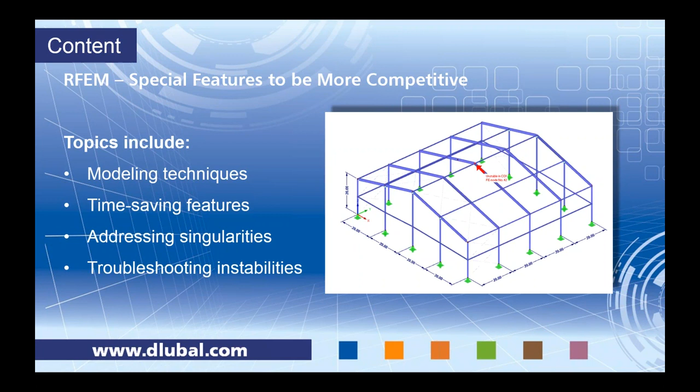I don't think there's a single engineer out there who has modeled that hasn't encountered an instability of some sort. So today I just want to show you some features in RFEM that I think help you troubleshoot these instabilities and overcome them quickly. And today's examples will be these 5 examples here. You can see a couple are more focused on the finite element surface elements, and the other 3 are more focused on beam and foundation structures of this sort. So with that, I don't want to spend too much time on the introduction. We can go ahead and get started with our modeling.

So for our first example today, I just have a simple frame here. If I scroll in, you can see our W shapes for our columns, W shapes for our beams, nothing too elaborate. It's restrained in the out of plane direction. And I went ahead and applied some line loads here. Dead load, we have 3 kips per foot. Live load, 2 kips per foot. And then I put a wind load, a lateral load of 1 kip per foot on the structure.

You'll also see here I have some load combinations that were just created according to the ASCE 7 using these 3 load cases. And then I also have my result combination. Result combination is nothing more than an envelope solution to give you the max and mins for all the load combinations that I have specified from the ASCE 7. So with this result combination, I want to go ahead and run an analysis.

And it tells me that the results are not found, so it's going to go ahead and run through all of those load combinations. And if I take a look now, I have a results option down here at the bottom of my Project Navigator tab. So this is where I can actually control what I see graphically from my results. You can see here that right now I have my moments in the local Y direction displayed.

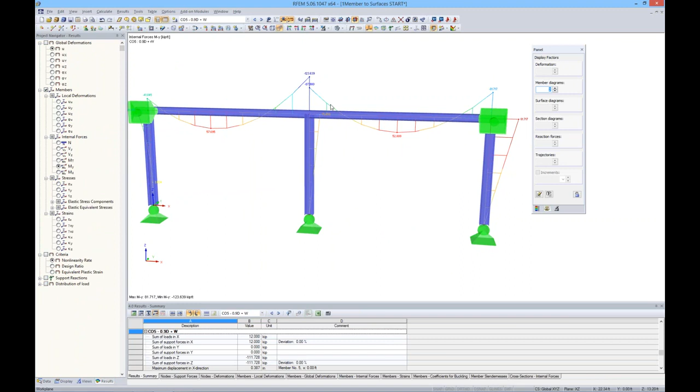And we have a max and a min, and I can go ahead and scroll through all of my load combinations here, and it updates according to which load combination was shown. I can go ahead and increase my member diagrams here just so you can see them a little bit more clearly. And we can take a look at our axial forces. Maybe we want to take a look at shears.

We have stresses here. And the other thing that I also utilize in this model is we have, as I mentioned, quite a few add-on modules. So we have one called RF-STEEL Members, and essentially it's just a stress analysis of our steel members. I'm using the results from our result combination to go ahead and get a stress ratio.

And you can see here that if I take a look at my colored panel list, my ratio is actually 1.11 at this intersection. So for design purposes, this obviously is not okay. We can't have over 1.0, and in some cases, maybe it's 0.8, it's 0.9. You can see the rest of the beam is relatively okay, even at these other column locations at 0.75.

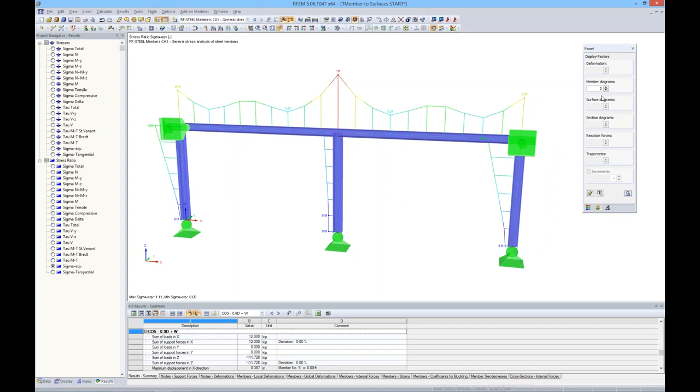If I go ahead and decrease my member diagram, we can really see clearly where the problem area is. It's right at this intersection. So we have a couple options here. We can certainly increase the size of our members, but again, this can result in an over-conservative design because the only problem area is really this intersection here.

So what I'm going to propose is that we maybe take a more detailed look at our intersection here with a finite element analysis. So if I go ahead and go into our wireframe view and I turn off my results, we can see here that our members are just simply 1D elements. When you're drawing a member in the program, it will only be this line, which is the centroid of the section, as a 1D element.

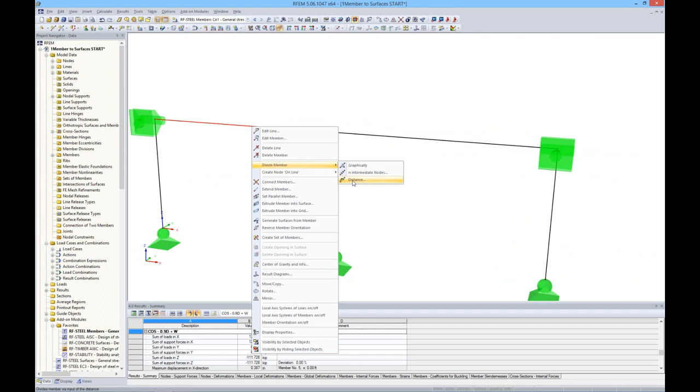I want to go ahead and divide this member here. So all I need to do is right-click on the member, and I go to Divide Member, and I have a few options here, but I want to divide by the distance. You'll notice this arrow here is going from left to right, so we know where the start and the end of our beam is. So I want to go ahead and divide the member 2 feet from the end, and I hit OK. So now you can see that I have 2 separate members.

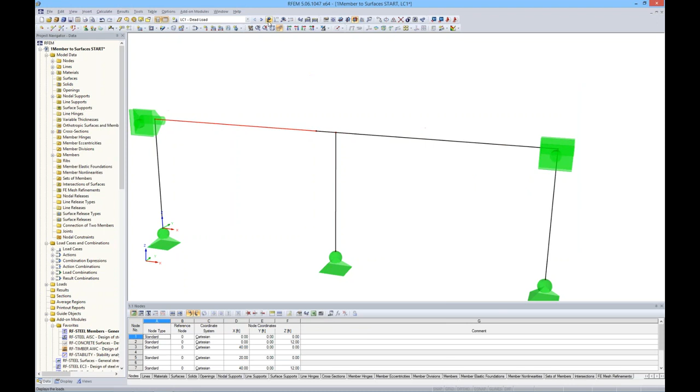And you might be thinking, okay, well, what about the loads? What happens with the loads when you divide a member like this? But you can see that the loads were also divided, and the program's smart enough to keep that value on the divided member as well. So we want to go ahead and do the same thing with this one. So I will divide the member by end distance. And this time, because my arrow is going the same way from start to end, I want to divide it from the member start by 2 feet.

And if I select this column and simply hit the Enter key, the last dialog box will come up. So that's just a quick tip rather than right-clicking on the member to pull up the dialog box again. And we want to go ahead. And now we have these 3 separate members right here. So I'm going to go ahead and render it again.

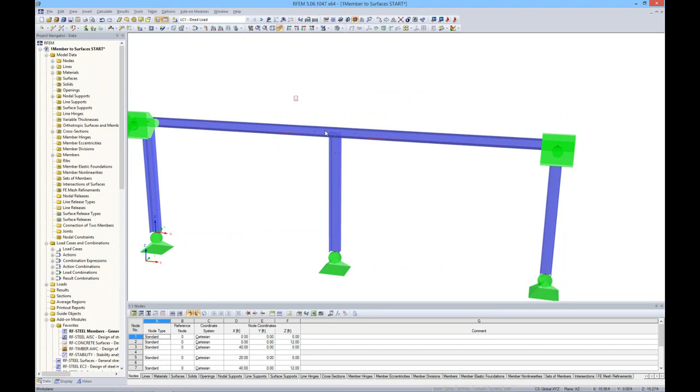And I'm going to select these, and the selection is just similar to AutoCAD. If I drag from left to right, it will only grab what's in that box. If I go from right to left, it will grab everything that that box touches. So for this case, I'm just going to select here, and I'm going to choose visibility by selected objects. So now I can no longer select anything other than these 3 elements that I specified before.

So this is a pretty powerful feature that RFEM has that I haven't seen too often. If I select my 1D members and I right-click and I go to my member, I can generate surfaces from members. And now you can see, let me go ahead and put it in the wireframe view, that these 1D elements are now surfaces.

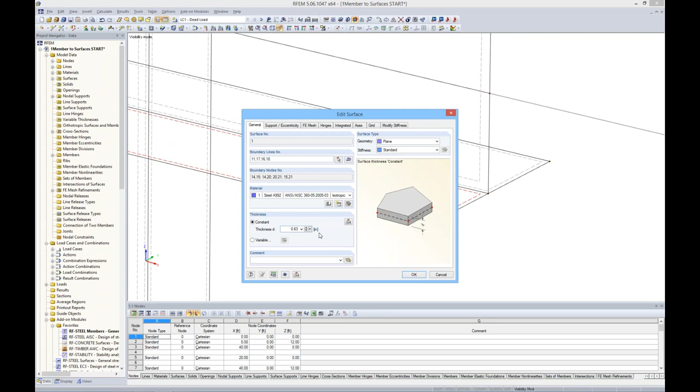So they're 2D elements now. If I click on the web for this surface, you'll notice the thickness is 0.38, steel A992. All of this is taken directly from the section that you specified, the W shape. If I select a flange down here, the thickness is 0.63 inches. So again, everything was taken from that W shape.

So you might notice here that we have some geometry issues. Obviously, this is not valid. So we want to move the flanges of the column to the bottom flange of the beam.

I'm just going to hold down my Control button and select all of these nodes at once, and use our Move Copy tool. I don't want any copies here, I'm just going to be moving. Typically I would need to know what this distance is to move these flanges down to the bottom flange of the beam. Maybe after a little while I could decide, okay, half the depth, take into account the thickness of the flange.

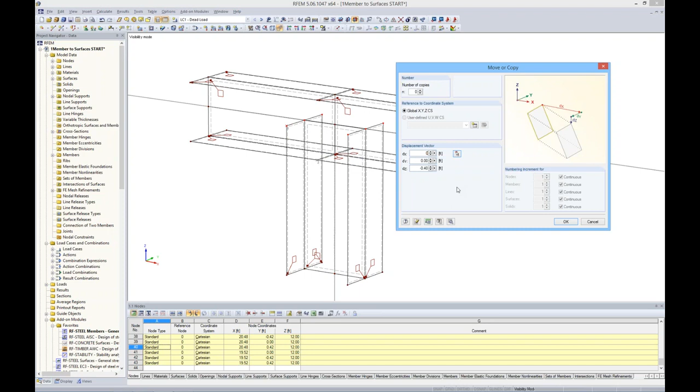But instead, RFEM has this tool where we can select 2 points to actually get a displacement vector. So if I select from the top of the flange down to the bottom of this flange, you can see I now have a displacement vector in dx and dz. We will not be moving it in the dx direction, but only in the dz. So I hit OK, and you'll notice that everything lines up quite nice.

Now, the other thing to consider is that we have this single point here where this 1D element is framing into the surface. This can actually cause a singularity. All of these forces are being transferred to this one particular point right here rather than being distributed over this entire surface. So actually what I want to do here is to create a rigid plate at the end.

For our surfaces, if you go up to this button up here, you'll notice that we have quite a few shapes that you can choose from. So we have donuts, semicircles, triangles, anything really that you'd like to do, polygons, and the program will create this surface element and automatically mesh everything. So there's no need to individually mesh the elements.

Some other programs require you to tie nodes together, tie elements together, but the program will do this all automatically. So for this case, we're going to go ahead and choose polygon. And for my stiffness, I'm going to choose rigid. Everything's grayed out because our stiffness is super high. So here we will just go ahead and draw our plate. And once we close the loop, we can see that we have a new element here.

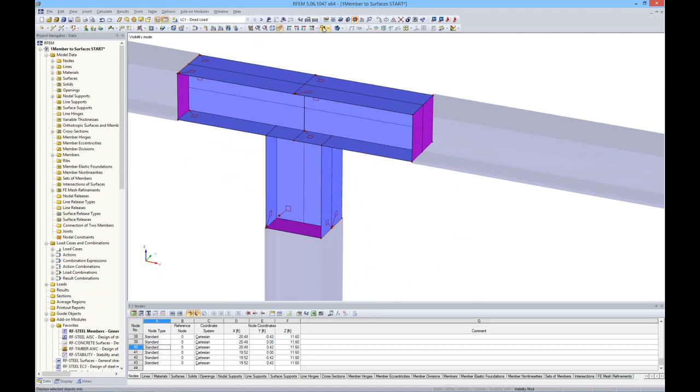We will do the same for this side, and lastly, we want to do the same on the bottom of the column. And I right mouse click to get out of that dialog box. You can see now that if I go ahead and render my views and turn off my visibility mode, that everything lines up quite nicely.

Surfaces are only modeled at the center line of the thickness, so we do have the option in our display menu. This display menu is essentially everything that you'll need to adjust your graphical view. If I scroll all the way down to the bottom, I have the choice for rendering here, the model, the solid model, surfaces, and I can actually fill including the thickness. And then if I zoom in, you can see that everything lines up with the 1D element to the surfaces. I will go ahead and turn that off.

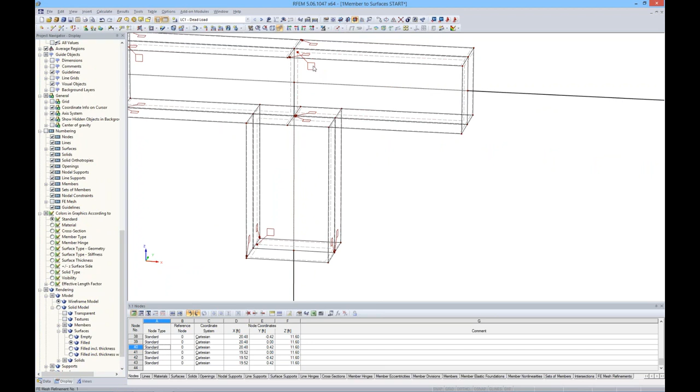Now the other thing I want to show you is the FE Mesh. You can notice that the program has automatically inserted these refinements. For the sake of this purpose, I'm going to go back to our data and go ahead and delete these.

Now, if I go to calculate FE Mesh settings, and I think most people are familiar with this with an FE analysis, you have to specify your length of your finite elements. Default is typically 1 foot. If I go ahead and generate that 1 foot, we can see that this is clearly too large for this situation. We only have one FE element for the entire width of this surface here. So if we go to calculate FE Mesh settings and change this to 0.1, regenerate the model, we can see that this is much better.

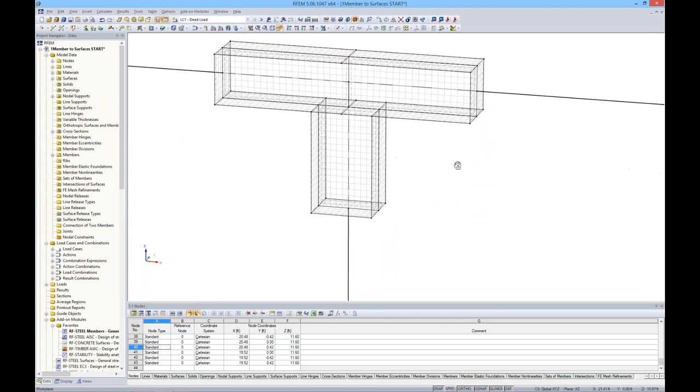The program is tying all nodes together, all lines, so you don't need to worry about that. Okay, so one last thing to consider is our loads.

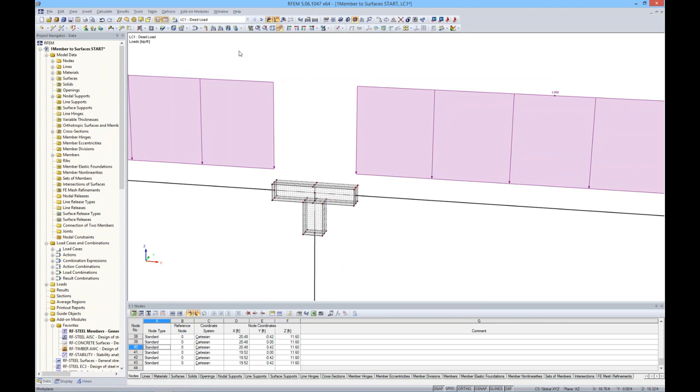For our dead load, as I mentioned before, we kept these two member loads, but in this case we don't have a member here anymore, we have a surface. So we need to delete these, and I'll apply a line load instead, which is similar to a member load except it can be applied to surfaces.

For here, we want to apply -3 kips per foot. I zoom in and click on my lines, and now you can see that the 3 kips per foot has been added.

I want to adjust my live load. If I hold down the delete key and click on each load, that will delete those loads. Again, I draw a line element, and because I'm in live load up here, that is the load case this load will be generated into. For this one, I want to specify it as -2 kips per foot. I scroll in here, and we have our loads.

Okay, I believe we're ready to run our analysis. I go to my result combination, and it's asking if the results are not found, and up pops our dialog box. This will take slightly longer than our 1D elements because we now have the 2D surface elements. You'll notice it's simply going through each iteration as the load increment increases.

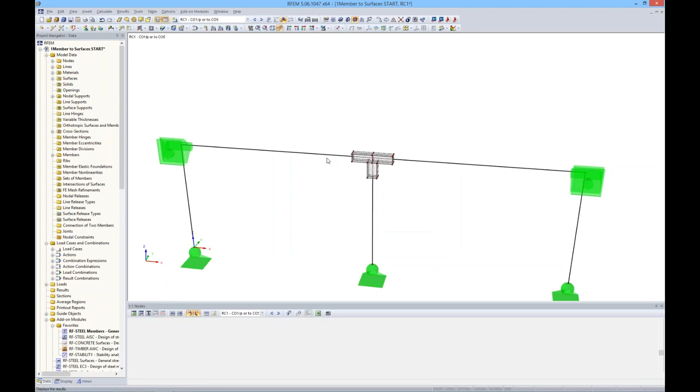So instead of the members, you'll notice the member diagram stops short of those surface elements, which is fine. I'll turn that off and take a look at our surfaces. If I scroll in here, I can now view all the different internal forces for the member: shears, moments, everything of the sorts.

What I'm really interested in is the stresses, so I go ahead and view the von Mises stresses. Everything looks okay until I zoom into these points. We can still see that it's extremely overstressed.

So we have an option here where maybe we want to add a plate to this bottom flange, maybe an inch plate.

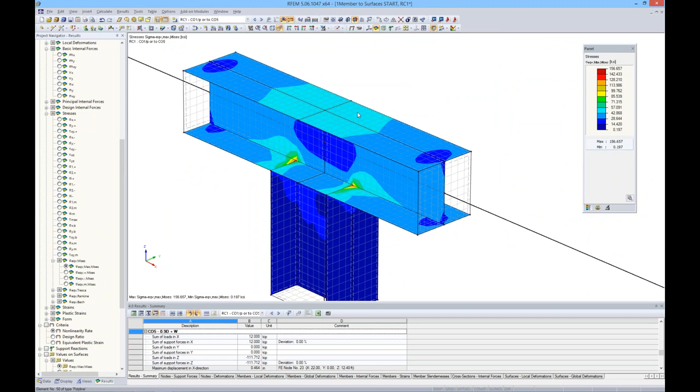If I turn off my results and hold down, select this surface and hold down the control key, then I can select all of these bottom flanges. Now I can right click... oh sorry, I lost it, let me do that again. Okay, now I can right click, edit surface, and let me increase my thickness to 1 inch.

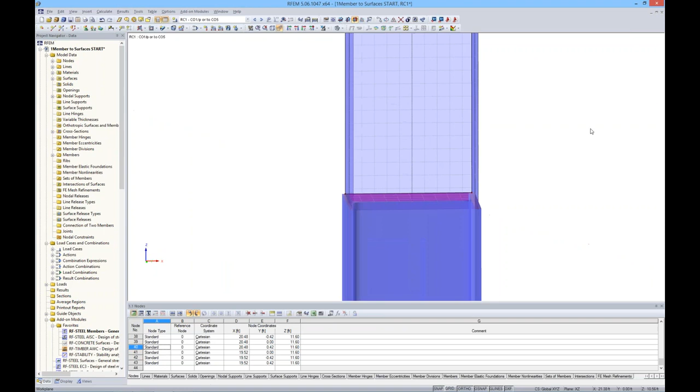In the rendered view, we won't see that unless we change it to the thickness under our display options. You'll see that it's slightly thicker than our 1D element, which is exactly what we want. I'm going to change it back to here.

Now, the other option is to do a plastic analysis. With our add-on module, MatNL, which takes into account nonlinear materials, we can select all of these, right-click, edit our surface, and create a new material.

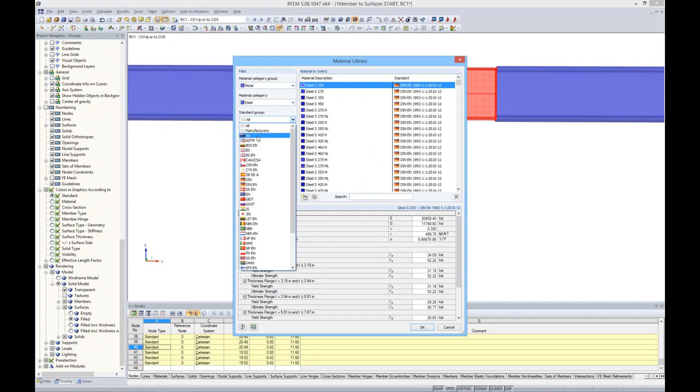I go into my materials dialog box, and you can see the library is full of quite a few materials. We can filter them according to metal, steel, ASTM, but more importantly we have this favorites group option, so you can just save the ones you use most often. For me, I created one called USA, and I'll use steel A992.

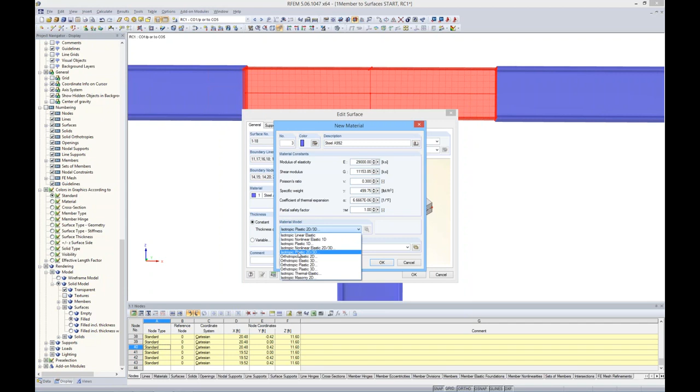Now, the material model default is isotropic linear elastic, but for this case I want to use isotropic plastic 2D, 3D. Up pops this other dialog box. You can see our stress strain diagram, with our yield stress here, 50 KSI, automatically filled out, and our strain hardening modulus. So here I can click OK. Everything looks fine with that. I hit OK, and I hit OK once more.

And if you zoom out, and you're not quite sure if the material is different than the rest, you'll notice I'm in my table down here with steel A992, which is isotropic linear elastic. As I highlight the field in the table, the members themselves will highlight as well. This blue one just means it's not currently being used. And the steel A992 plastic 2D, 3D, you can see those were actually applied here.

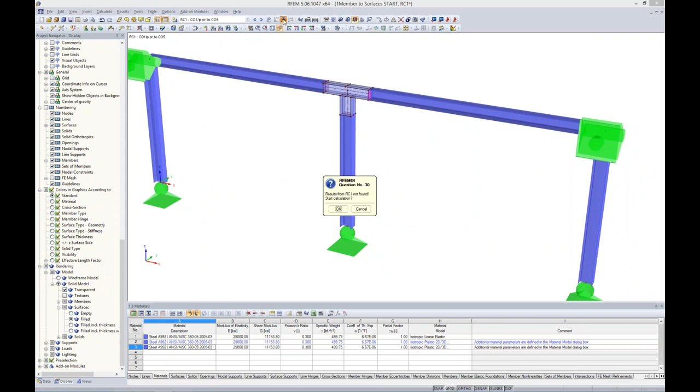Okay, so I want to go ahead and run my result combination again. This will take slightly longer than the last one because now it's a nonlinear material. Keep in account that the size of your mesh also matters for your finite element analysis—at some point, the smaller mesh you go won't change your results. So I'd suggest keeping a mesh that doesn't create a super long solve time but still gives you accurate results. You'll notice if you decrease the mesh size and solve again, your results won't change by much.

We also have this graph here that shows the maximum displacement as the program cycles through each iteration. So as soon as this is done solving, which will be just a second longer—again, it's just because we have a nonlinear material.

Now I want to take a look at these contours. Each FE element actually has a value at each corner, and what the program is doing is using a smoothing algorithm to tie all of those values together to create a nice smooth diagram.

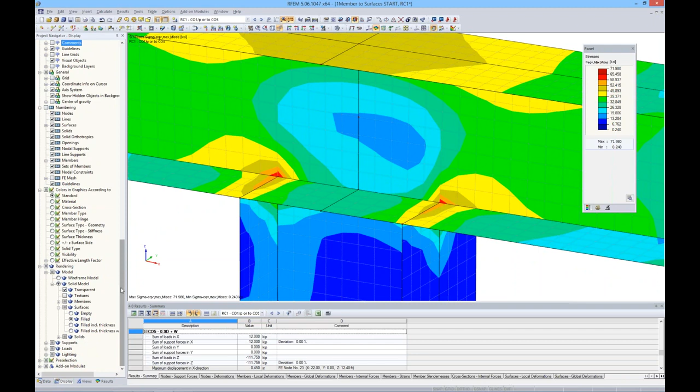Under my display tool, if I scroll up to results, I want to choose constant on elements. This is going to average out the 4 values for each FE element, so you can take a look individually at each one. You'll notice that nothing exceeds 50 KSI, which is our yield stress—exactly what we'd expect.

I think an important thing to show you here is that we have an option under results called criteria. This criteria will actually show us the FE elements that are in their full plastic state at 1.0. These other two green ones are somewhere in between 0 and 1 as the ratio, and the other elements have not reached that state yet.

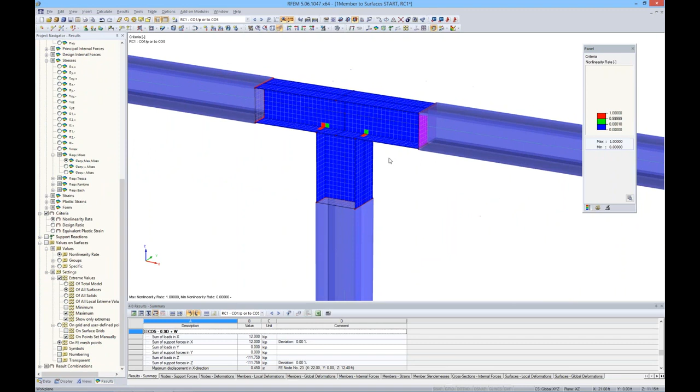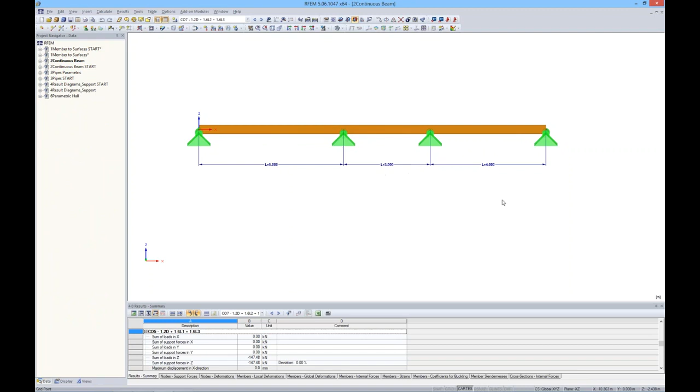So that simply concludes our first example. I want to go ahead and move on to our next one, which again is very simple—it's just a continuous timber beam with 3 spans, nothing too special about it. But actually what's going on behind the scenes is quite powerful.

The purpose of this example is to show you the use of parameters, or parametric modeling. If I go to edit parameters and move this dialog box down, you can define a variable in the program and use these variables in an equation to change span lengths, loads, or angles. There are quite a few options—we can change areas, angles, surface thicknesses. I'll get into that in just a minute.

If I type in 2 meters here, and for my B length, which is my second span, I'll type in 5, and for my C length, I'll type in 3. I hit apply, and you'll notice everything is updated—the supports moved. I also want to show you that if I look at my dead load, everything was adjusted with the loads as well. We have separate live loads on each span, and those were all updated too.

Now let's say I want to edit my live load to -2 kilonewtons per meter. I go ahead and hit apply, and you'll notice the live load was updated. So you can understand the benefit of using parametric modeling for a company that creates a lot of similar structures, but where geometry or loads change slightly—you can use parametric modeling to deal with these similar structures and improve your efficiency.

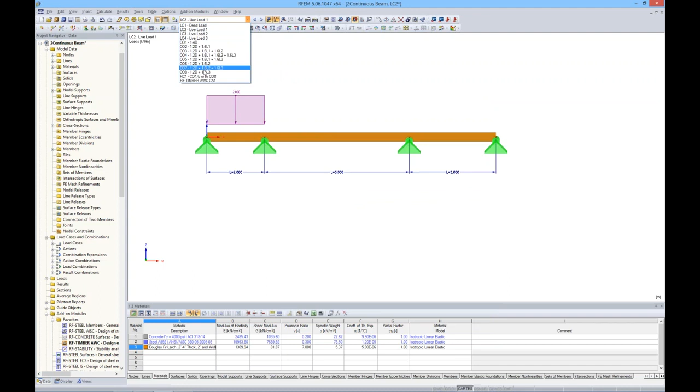Now the other thing I wanted to show you is if I go ahead and, again, I created quite a few load combinations from the ASCE 7. If I take a look at my result combination, it's asking if I want to run the calculation. Yes, this is just finding the max and mins of all those load combinations.

Now I want to take a look at my support reactions. You'll notice here that as I scroll through them, my support reactions are changing according to the different loads that I have. Now I want to show you our print report option and including these parameters.

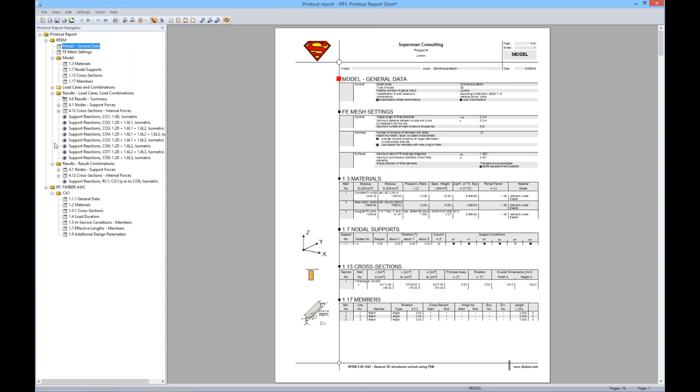I think RFEM has quite the powerful print report options compared to a lot of other software I've even used in my design career. If I go ahead and open up a printout report I created previously, a separate dialog box will open. You'll notice on the left is our table of contents, or report navigator. I can click on these and our report will update according to where I am.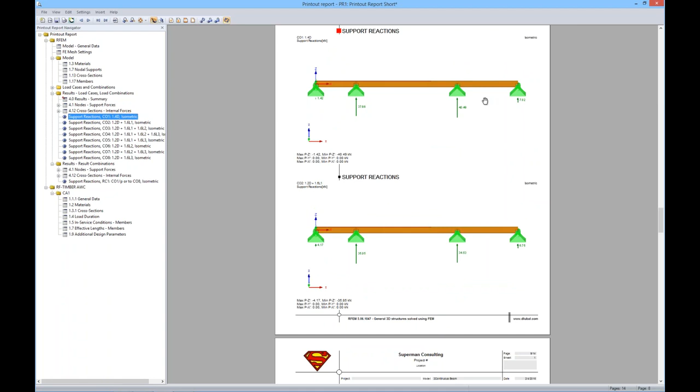Now the same goes for here. I can keep scrolling down and the table of contents will also update. I went ahead and put in some pictures here of our support reactions, and you can see this is reflecting our spans that we currently have, which is 2, 5, and 4, for each load combination.

If I go ahead and zoom in here, I can see load combination 3, my support reactions, my max, my min. Everything has nice headings, it's very clear. But let's say, okay, well my beam just changed all of a sudden.

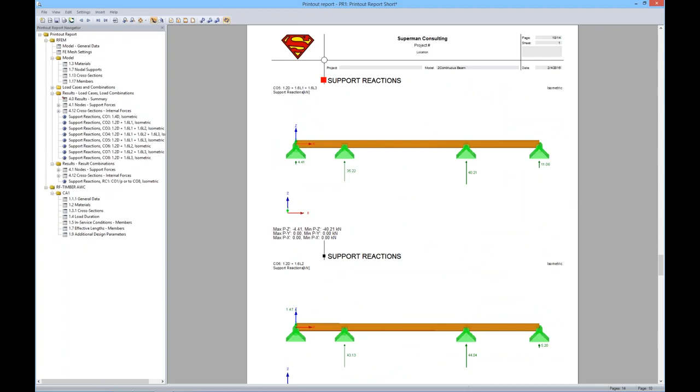So I'm going to exit out of this print report, no I don't want to save it. I'm going to open up my parameters, which down here in my table under my first model data tab is a quick link to my parameters.

And let's say I want to do 5 meters, 2 meters, and 3 meters. I hit OK, and you can see that everything was updated. Now I want to go ahead and run the results again, and I go back to my print report.

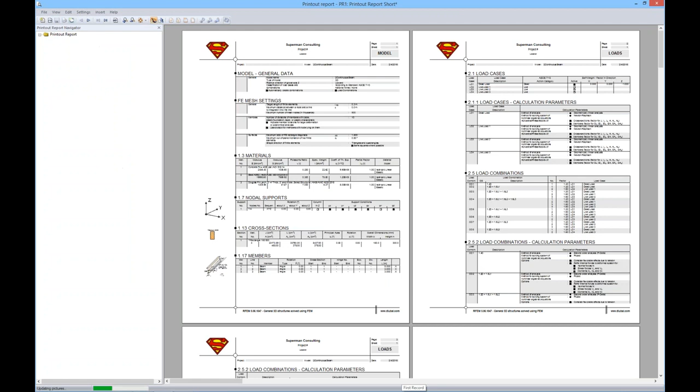Now I want to go ahead and jump down to these pictures, and you can see, well, it looks like we are missing our support reactions. Well regardless, I think we can see from our results here we have the support reactions shown, and it looks like they're shown here.

And it should go ahead and update in our printout report. I'm not quite sure why, but regardless, the geometry is taken into account, and everything in the print report will be adjusted according to the changes you just made.

I can showcase this a little bit further with the printout report by taking a look at our members. I'm going to turn off my support reactions, and I just want to view my moment about the y-axis. Of course, as I scroll through... oh, that was probably the issue.

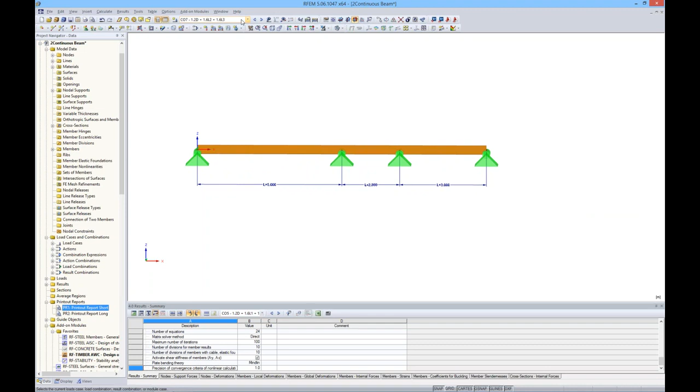I didn't run a result combination. So again, this is just an envelope solution of all the load combinations, and I think that's why the print report didn't show up, because I didn't run all of them.

I can go ahead and scroll through each load combination for the moment about the local y-axis. I go ahead and increase these, and let's say I wanted to print off this moment for each load combination.

Typically you would have to take a picture or a graphic, insert it into your PDF print report, go back, change the load combination, do the same thing. But we have an option in here called mass print. If I go ahead and go to my print option, graphic printout, I see the mass print here.

Now I can hit these settings right here, and I have 3 tabs that pop up: model, loads, and results. I'm currently in results, and the program knows I'm looking at the moment about the y-axis. But for my load cases and combinations, instead of the current one I'm in right now, I'm going to select all.

I hit OK, and now the program's cycling through each load combination for my moment about the y-axis, and it's going to insert those into this print report automatically.

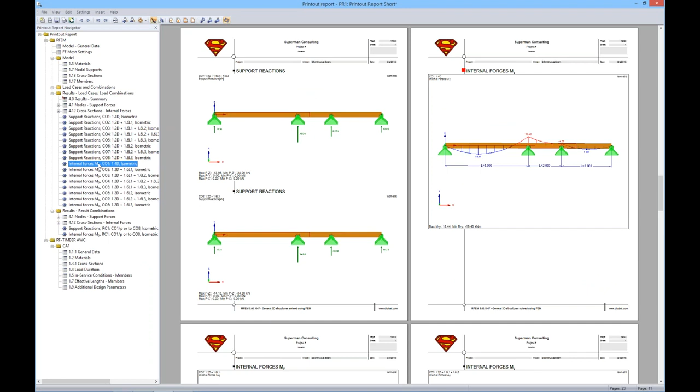So you can see now that my support reactions were updated. I just needed to run my result combination. But if I go ahead and scroll in here, I can see that now I have my load combination 1 with my moments, and it shows my max and my mins.

Scroll down, load combination 2, load combination 3. Everything is done automatically. So I think you can imagine how much of a time saving that is when you can use this mass print option.

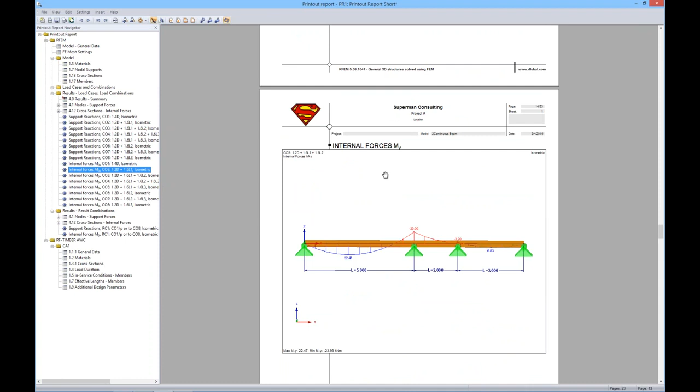Okay, so the question is, with parametric modeling, how do we actually incorporate these parameters into a model? So for the sake of time, I have already created this simple beam, and I've applied some loads on it just according to dead load and live load. And I want to go ahead and edit my parameters.

Now if I type in A for my first span length, the length automatically pops up and we'll just do 3 meters. B for my second span length, we'll do 5 meters, and C for my third. Now you notice nothing in the model is changing right now. I'm just simply defining what parameters I want to have in the model. And we'll go ahead and make this one 4.

Now let's say we also want to consider dead load. Now instead of length here, I actually want to go down, and this is where I told you before there's quite a list to choose from for the amount of parameters you can actually define. Precambers, moments, stresses, time, mass, percent. So we have quite a powerful option here when it comes to parameters.

For this case, I'm just going to go for a line force, and I will go ahead and do -4 kilonewtons per meter, and maybe my live load, again a line force, and I want to do -2. Okay, so now that we have our parameters defined, we need to actually apply them to this model.

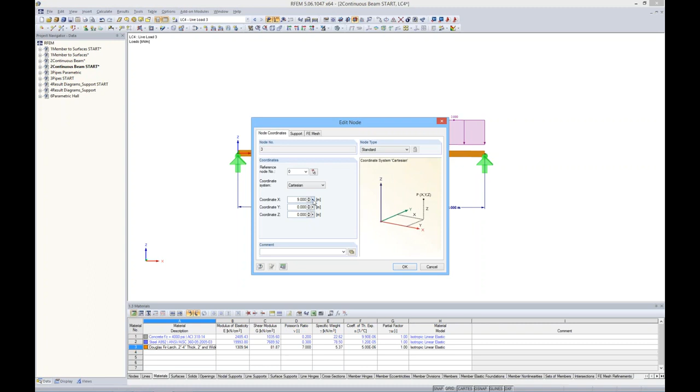I go ahead and do the same thing to this node. It's set at a static 8. I want to edit my formula, and I'll do A plus B. And now, again, it's dependent on those parameters. And lastly, I want to do this one, and I will go ahead and edit my formula, A plus B plus C. Okay, so everything is now dependent on my A plus B plus C.

Now we also need to do the same thing for our loads, and we can go ahead and highlight all of these. We right click, edit member load, and we can go ahead again the same way that we defined those node coordinates. Instead, here for the load parameters, for the actual value, I can use this arrow, edit formulas, and choose my dead load. I hit OK, and now that dead load is dependent on that parameter.

Now we just need to go ahead and do the same for each live load. And so instead of dead load, I'll go ahead and choose live load here, hit OK, and I do the same for each span. Edit my formula, add my live load, hit OK, and lastly I have this one.

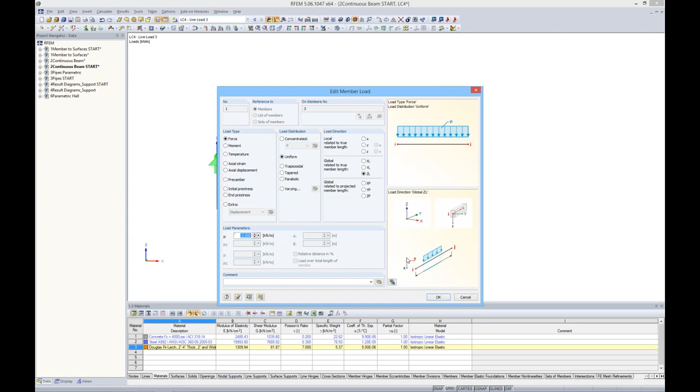Okay, so now if I go ahead and move this up and I open up my parameters, I change this to 2 meters, 3 meters, 6 meters.

We should see that everything is updated just fine. For our live load, we'll go ahead and choose -6 and apply that, and everything is updated. So you can see that this is obviously quite valuable, again, for a lot of the similar structures that you're working on, or maybe it's the same structure and there's a lot of changes going on within the design process. So that sums up that simple model.

So we'll go ahead and move on to the third one. This one is a little bit more complicated FE analysis with our surface elements. And I also created this model to have parameters in it as well. So you can see here I've defined my parameters, my angles, my loads within my pipes, which you can go ahead and define a pressure load within this pipe and maybe the spacing between.

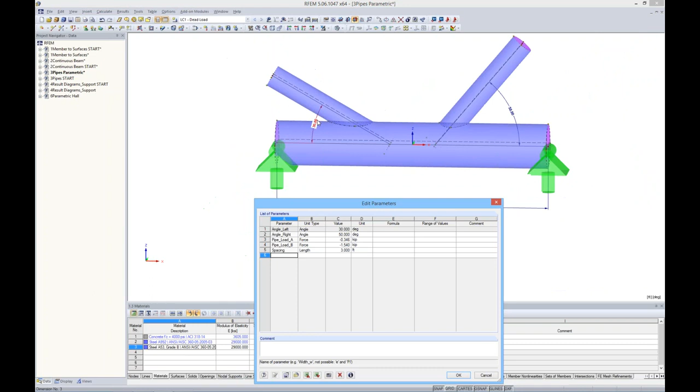If I go ahead and change this to 30 degrees and I hit apply, you'll notice that this pipe automatically changed to 30 degrees here. One thing to take note is that this is an intersection of surfaces. And you'll notice that when I change this to 30 degrees, everything was updated. There's no need for me to change my FE elements. I don't need to go back and change the geometry. The program's smart enough to make all of those changes as I go ahead and adjust the model.

I can show you guys again, if you take note at this 50, I can go ahead and change my angle to, let's say, 70 degrees. And I'll go ahead and hit apply. Again, everything is updated automatically.

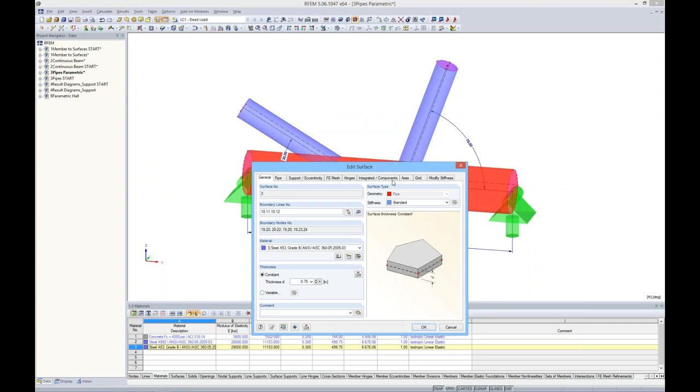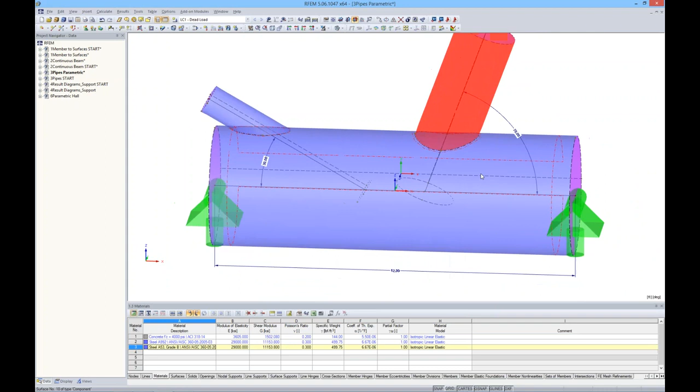I even have the ability to click here and right click to edit the component's parent surface. And we have a pipe option here. And I can change my radius to 2 feet. Again, everything is automatically updated. Those surface intersections are moved up and everything looks quite nice. We can do the same here. Maybe make this radius a foot, hit OK, and again, everything looks okay.

So I want to show you guys how to go ahead and create this model and create an intersection of surfaces. So I'm going to go ahead and open up this beginning model, and all of these are just line elements. They're not members, they're just simply lines in the program. I can define maybe members out of them if I wanted to, but in our case, I'm going to go ahead and apply a pipe surface. So I'm using these quick tools up here, and you'll see there's an option for pipe.

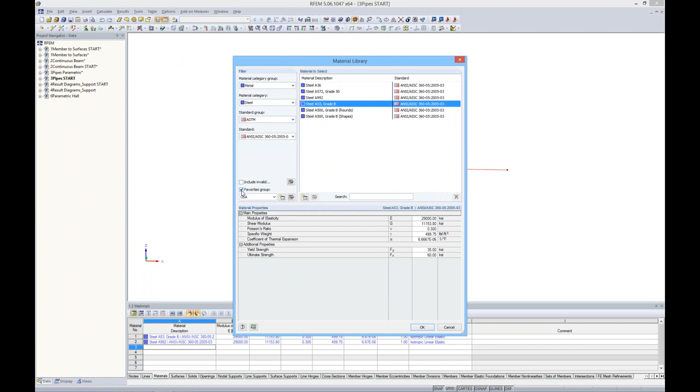Maybe my material when I first open it up is something like concrete, or maybe it's even timber, just something not applicable. So I can go in here to import a new material from my library. And again, for even metal, steel, ASTM, we have tons and tons of materials. I want to utilize my favorites group again, and I'll just go ahead and choose my steel A53 grade B. My thickness for my pipe, we'll just set that to 0.6 inches. And now we need to click on the pipe tab up here and choose our radius, which we'll just do 1 foot.

Now you'll see that the program automatically applied it to this line because I had it selected when I went into that dialog box. I want to go ahead and do the same for these two elements. So I can go in here to my pipe surfaces again. And you can hit the enter key and it will bring up that same dialog box, which is a little bit time saving. For my thickness here, I just want 0.2 inches, and my radius, I'll set it at 0.5 feet or 6 inches for these smaller strut pipes. Then all I need to do is just click on those lines and everything's created.

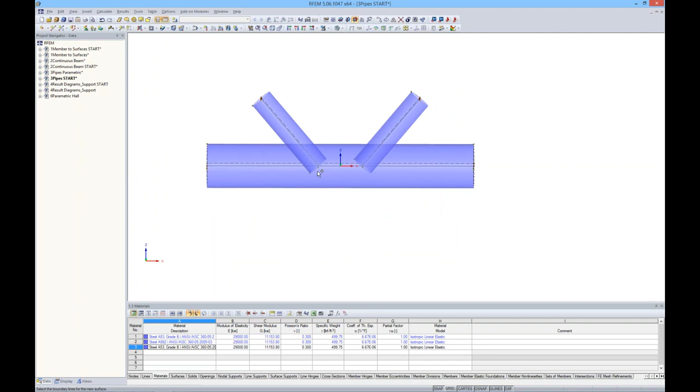Now, you'll probably see that we have some issues with our geometry. Same thing as the first one, we have some intersections here that we need to take care of. So what I actually want to do is to select everything, and I'll right click, and from my surface, I want to go ahead and create an intersection. And the program will automatically intersect all of these surfaces that I have selected. Now they're all just surface elements, but again, we need to take care of this geometry.

So I'm back in my data navigator for this model, and I can actually go to my surfaces here. And if I expand my surfaces and I click on them, you can see as I scroll down the list that it's actually highlighting each element that I'm clicking on in the graphic view. So we get to this component right here, and we do not want to consider this in our analysis. Typically, this would not be a realistic situation. So we can right click here, and we can actually deactivate the component.

So you'll notice here that it says inactive, and it's gone from our solution. I can go ahead and do the same thing for this one, deactivate, and I also have the ability, of course, to activate it again. But for right now, this is exactly what we want.

Now, just like the first model, we need to go ahead and create some rigid end plates here. And instead of the polylines, I'm going to go ahead and select a boundary line. I want to select rigid here. And all I need to do now is just simply select these circles. So you can see how easy it is to apply surfaces in RFEM. It's just simply the click of a button. I can right click to exit out of that.

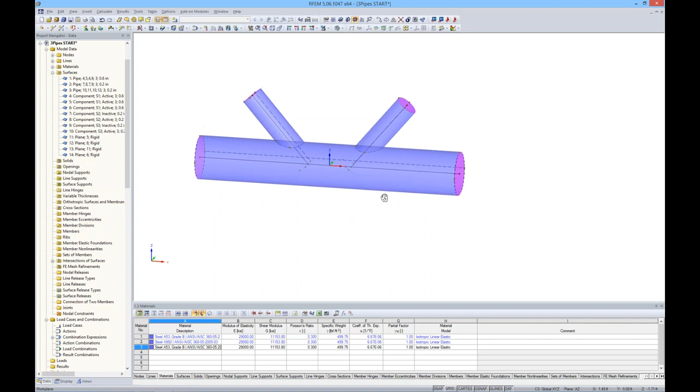Now the next thing that I need to do is to apply some support. So I'm just going to click on New Nodal Support. And maybe I don't know what this is, so I want to create a new one. And you'll notice here that we have a lot of nonlinearities available. Maybe you have sliding, maybe you have friction, you can define your own diagram. So quite a few options here, or we just have the typical linear nodal supports.

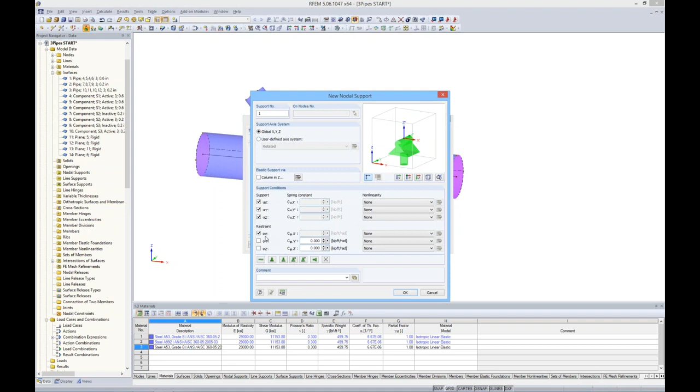And for my case, I'm just going to restrain it in the X direction and in the rotation about the X, and then in the X, Y, and Z direction. I can hit OK, OK, and all I need to do is just click on these nodes.

So lastly, I want to just create a simple load case. Let's just do self-weight. So I'll call this load case description dead load, and I just want to activate self-weight. And now we just have this single load case, and we can actually view our results by running the combination. Actually, I forgot one thing I wanted to mention. Let me clear these results. You can see it right here.

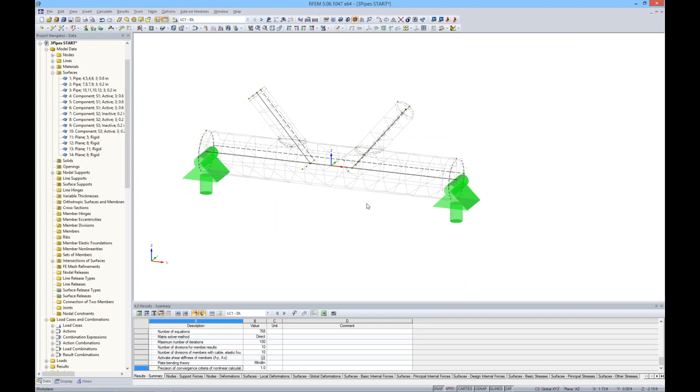You can see our FE mesh is not ideal. It's too big, and you'll probably find as you decrease this that your results are going to change. So when I go to calculate FE mesh settings, the default is 1.0. So for larger structures, this may be completely adequate. But for a smaller model like this, let's change this to 0.25, and we'll regenerate our model. And that looks quite a bit better.

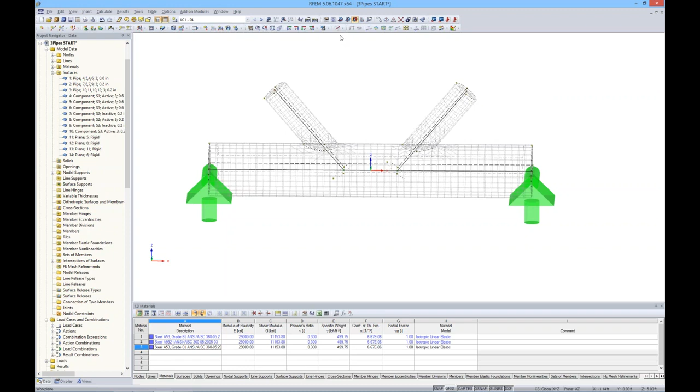You also have the ability to add an FE mesh refinement, let's say around this area, around a line. And what that will do is actually decrease your mesh size only around this area without decreasing the entire model, which can significantly save on solve times. So let me run that analysis again now that we have a better mesh. And we're only running dead load, so it should just take a second.

And now we can see that we are viewing our von Mises stresses for the pipe. Again, similar to the first example, maybe we have some higher stresses here that we want to address. We can certainly view our deflections, which is actually only 0.001 because it's only self-weight. So I'm not going to do the parametric modeling because we went over that in the last example, but you can see how powerful surface elements are in RFEM and how easy it is to apply them.

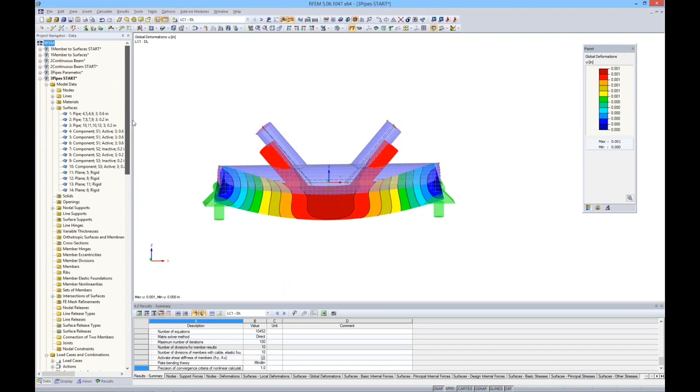Okay, so moving on to our next example is just a typical foundation. It's a concrete foundation. If I double click on it, I just have defined it as 4,000 PSI concrete. It's 12 inches thick, maybe a foundation or an elevated slab, something of the sort. I also have applied a few loads here. Just your typical dead load in KSF 1.5, maybe a live load of 0.75.

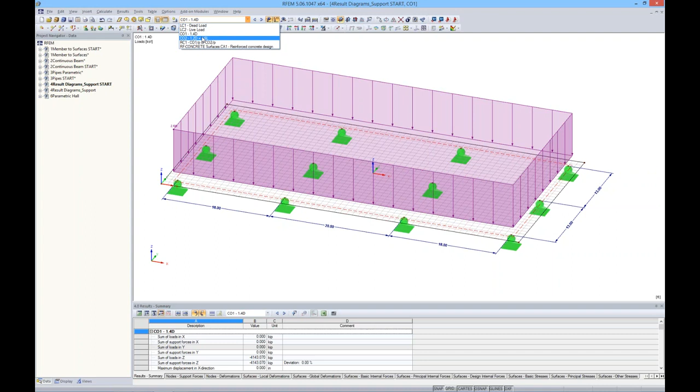And then I also have a couple load combinations here according to ASCE 7. Then I also have the result combination for the envelope solution. Now I've also utilized our add-on module RF-CONCRETE Surfaces. What this will do is actually tell you your reinforcement that's required according to whichever load combinations you choose. I ran RF-CONCRETE Surfaces according to my result combination because I want the max internal forces to be used for the design of my reinforcement.

So I can go ahead and solve here, and I already had them saved. If I look at my isobands, I can see here from my RF-CONCRETE Surfaces, and I'm looking at my required reinforcement.

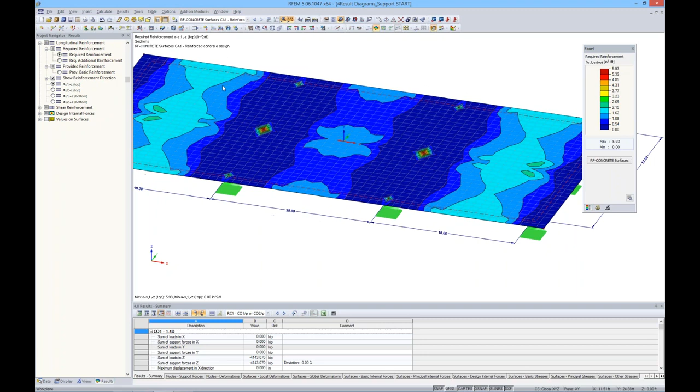I can zoom in. Everything looks okay except for these nodal supports. They look a bit high. The same, I can go back to my result combination. I'm looking at my surfaces, and let's say we want to look at our MX. Again, you can see there's much higher moments at these locations of nodal supports.

MY, the same thing. We can take a look at our stresses, very high stress concentrations at these locations. And this was a situation of a singularity, essentially, that we want to address. If we don't address this, then we will have a much too conservative design for our reinforcement.

So if I go ahead and turn on my grid, and my grid settings are down here. I can just snap that on. I can right click and hit edit, and I actually have my grid set up right now to dynamically adjust according to the size of the model. So it'll just move with me as I am doing my modeling.

We have a feature up here called define a section or results diagram. So if I go ahead and click on it, I want to define a section right down the center of this where those nodal supports are, and up pops this results diagram. So essentially, this is going to be just a section cut right through where I defined it, and you can see that my values are changing as I'm scrolling over the length.

Right now we have deflection shown in inches. Down here are my stresses. Maybe I want to view the MY. You can see that everything is significantly high right here at this nodal support. So this is the singularity that we want to address.

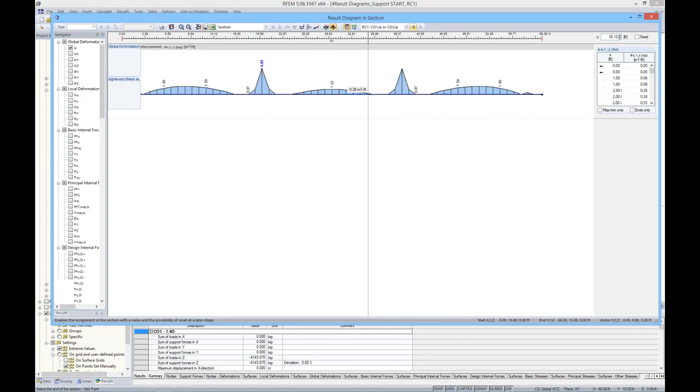I'm going to go ahead and save this section as midsection so that once I exit out of here, and I'll turn off these contours, now I can view my results as this saved section. I can scroll through load combinations to take a look at anything that I want to view here. So how do we deal with these singularities?

We have a couple options in the program. The first is we can actually consider a column support here with the correct spring stiffness to distribute the load to all the surrounding FE elements here. So rather than all of the load being placed on these single elements or these single node points, we can actually distribute the load.

And I think this is a pretty cool feature of RFEM that I haven't seen too often, but we can actually go here to a new nodal support. I'm going to create a new one. And instead of using these definitions down here, I can create elastic support via column in the Z direction. And up pops this edit column.

I have three options here. I have an elastic surface foundation, where you can see our springs are being tied to the FE elements, an elastic node support so that it's being tied to a single node, or a node support where it actually adjusts the stiffness of the FE elements as well. For our case, we're going to use an elastic surface foundation.

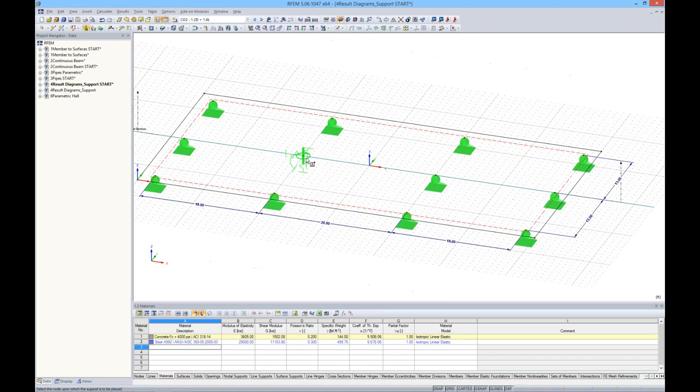Now, if I go ahead and run my load combinations again, this will actually be running the concrete add-on module to take a look at my required reinforcement. So we can see it visually here. Let me go ahead and turn off my grid.

If I go ahead and select midsection here and right-click, go into my results diagram, now we can see that it is undefined. We're only defining our reinforcement up to the surface of that column, up to the face of that column, which makes sense. This is typically what you would do.

Now we can see that the surrounding reinforcement required is much, much lower, but we're still looking at this singularity on the other node, which is exactly what I wanted to show you guys, how much our required reinforcement has decreased. So I want to scroll back to our results combination. Again, deformations don't really matter, but our stresses are significantly lower at the face of the column as compared to the single support over here.

If we want to take a look at MY, we can scroll down here. Undefined right here, still significantly high. So that is one way to deal with that singularity.

Now we have one other option. If I go to my data and expand on the model I am in, I can go ahead and look at my average regions here. If I right click and do a new average region, this will allow me to define my surface first, then define where I want to average out these regions.

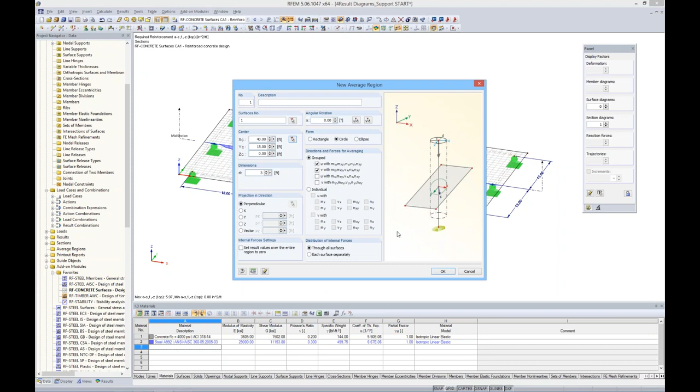And all of our internal forces will be averaged out within this 3-foot radius. I go ahead and hit OK, and I want to solve once more. You can visually see here that our average region is shown, and now we can see that our reinforcement is down to 3.64 inches.

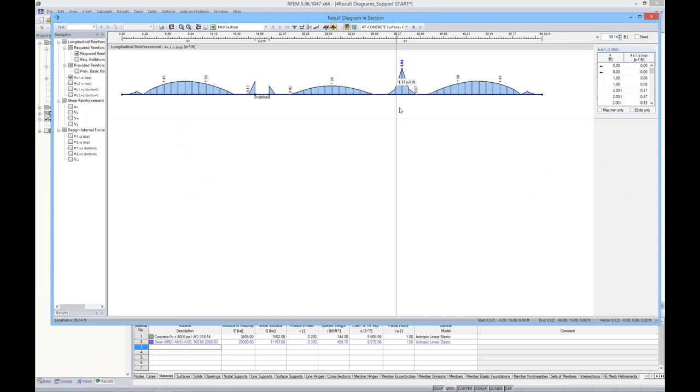We can go to our result diagram and see that that has been reduced. It's still higher than this other one because we aren't defining anything at the face of this column, but it is significantly lower in comparison to where we were. We can go into our RC1 and take a look at our von Mises stresses. Sorry, I have this other one shown here, but you can disregard that. Much lower than what we were looking at before.

And we can also see, let me go back to here. We can also go ahead and add in our MX, much lower than what it was before.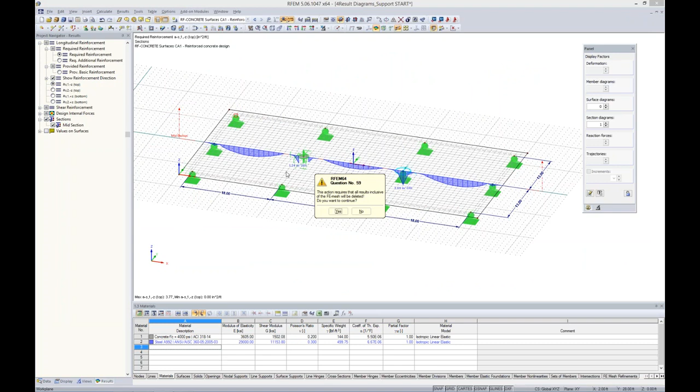The other quick thing I wanted to show you, if I turn back on my grid here, we have a powerful feature in RFEM which is called drag and drop. Let's say I wanted to copy this section over to here. All I need to do is highlight it, push down my control button, now I just drag it and drop it, and now I have another section here.

Let's say I want to do the same over here, and now I have 3 sections. You can go ahead and run one of these load combinations. Now you can see that I have these sections at all of these locations. What I wanted to show you is that essentially drag and drop can be used for anything.

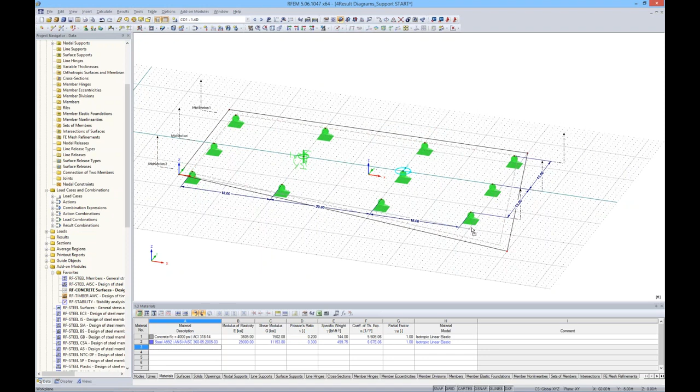Let's say I wanted to move this support here, or maybe the edge of this surface. It's asking me if I want to clear my FE mesh. All I need to do is just drag out the corner of that surface element. So you can understand that that's a pretty powerful feature instead of using the move option.

You can also click on something, hold down the control key, drag and drop it, and it's just a copy. You'll notice that my grid went ahead and expanded with it. I can do multiple elements, hold down my control key, and move everything over to here. All the dimensions and everything move as well, but you can understand how much of a time saver that can be rather than using the copy move tool every time.

So lastly, I want to move on to our last example, and we will go ahead and open up this parametric hall.

It's a simple hall, and to let you guys know, we have this under tools to generate model members. You can create quite a few different structures here. The continuous beam I used for one of our examples earlier. I didn't showcase it, but it's possible to do continuous beams, and also more complex 3D frames. If I click in here to create a 3D hall...

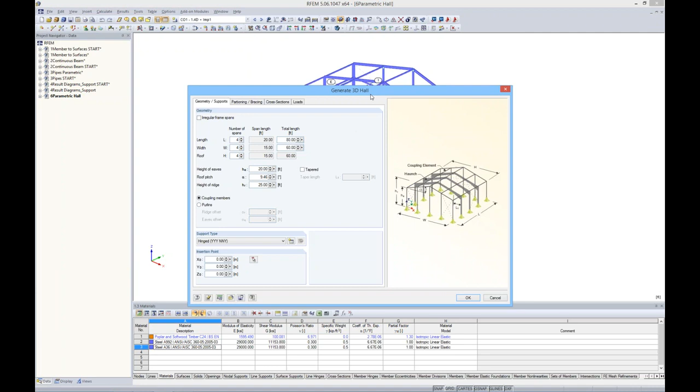You'll notice that I can define all my geometries. It's laid out very clear here in the picture. Any bracing that I may have, I can define my cross sections, and I would hit OK, and my 3D hall would be created. This one is also based on parameters.

Let's say I wanted this to be 15, and maybe another 15. And I go ahead and hit apply. The mesh will be cleared.

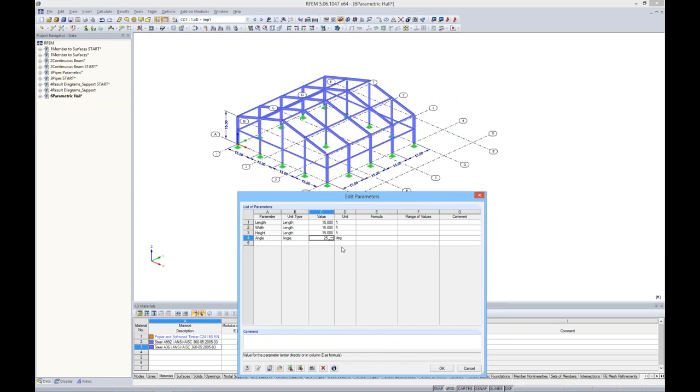Everything adjusts quite nicely. Let's say I want the angle of my roof to be a little bit higher, say 25 degrees. I hit apply, and now the roof angle is changed. So again, just another use of those parameters.

I'm going to go ahead and undo this. So with this parametric hall, I went ahead and added in some simple loads. Again, we have our dead load, and now we have some snow loads on here, which I generated using our snow load generator.

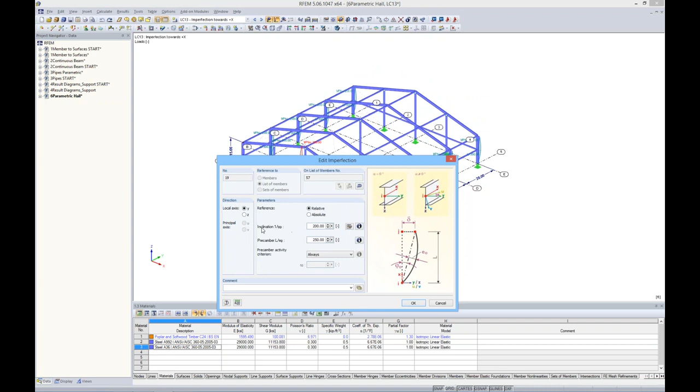And then I actually put in some imperfections here. Imperfections can be used for out of plumbness, or maybe we have a pre-camber. I just wanted to showcase this to let you know it's possible to take all of these into account. They are dependent maybe on the normal forces in the program, and everything is done automatically. You just need to define your inclination and your pre-camber.

I have my load combinations here according to ASCE 7, and it includes all of these imperfections as well. So let's take a look at this first load combination, and it's just 1.4 dead plus my imperfection. I go ahead and run it, and it begins to run. Then all of a sudden I get this instability.

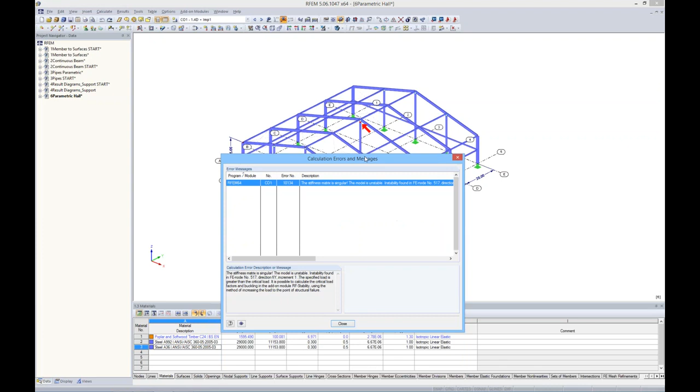It's an error message. As I mentioned, we've all seen these. However, down here in this explanation, it tells me the specified load is greater than the critical load. What's really unique about RFEM is that there's actually a big red arrow telling you where this instability is taking place. That can be extremely helpful for large models. So it's telling me that my specified load is greater than the critical load. I say, okay, now I need to go ahead and address this.

So with load combinations, everything is run according to a nonlinear analysis, taking into account p-delta effects. But for load cases, they are run as a linear analysis. Only load combinations will go ahead and apply those p-delta effects as a nonlinear analysis and adjust that stiffness matrix.

So for load case 1, dead load, I want to go ahead and run it just to make sure maybe my geometry is okay, that I don't have any nodes not connected. I go ahead and run it, and everything runs fine. You can see here that I have my results diagrams pop up for my moments about the local y-axis. So, okay, it has something to do with those secondary effects.

So what I want to utilize here, which I mentioned to you guys before, is we have all of our add-on modules down here under our data page. Quite a few options to choose from. I added a few here to my favorites list, and what I want to utilize today is RF Stability. So if I go ahead and open up RF Stability, this will actually show you the eigenvalues graphically of the behavior of your structure.

Even if you can't solve it like I just showed you with that instability, we can go ahead and show the behavior of the structure and also the critical load factors that will let you multiply your applied load by before you will see that buckling behavior.

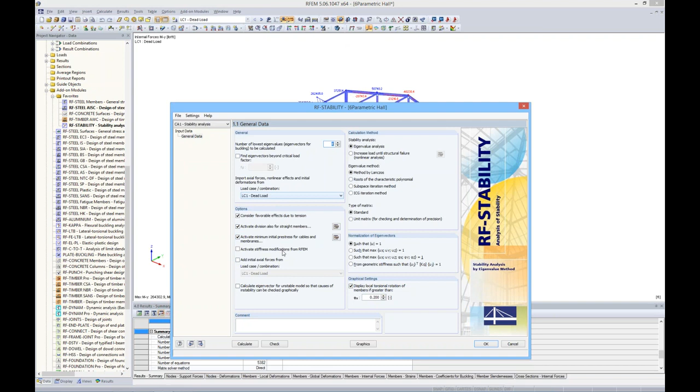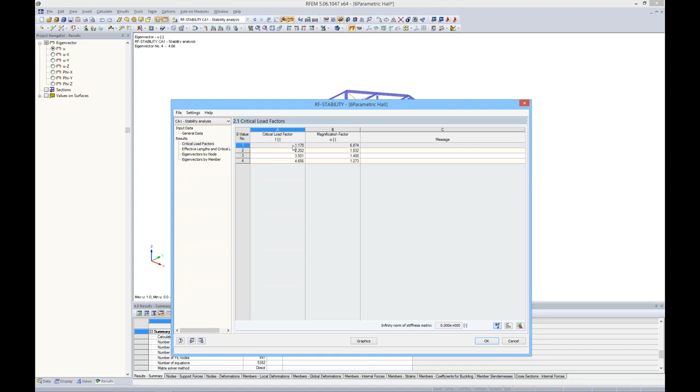If I go ahead and go to my graphics view and take a look at my first eigenvalue and play this animation, we can see that this column here is buckling out of plane. Let's take a look at the second one, and the whole structure is racking. If we take a look at our third one, it looks to be that column again, buckling in the other direction. And lastly, for our fourth eigenvector, still the problem column.

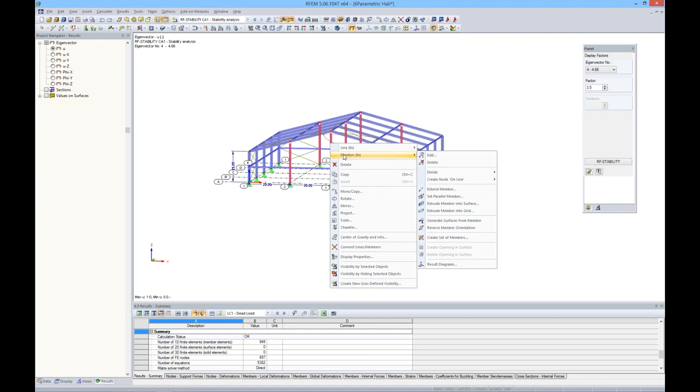So what we want to do is go ahead and address these columns in here. If I go ahead and select, let me turn off this movie, and select all of my columns in here. I hold down my shift key to make sure I've selected all of them down here, and I right click and go to edit my member. Essentially most things that you need, if you right click with something selected, there will be most of your options. So for this one, I want to go ahead and edit my member.

I see that these columns are a W8 by 58, which is extremely small. So maybe we want to consider increasing the section size. I can just go ahead and modify here, and I'll again modify my shape here.

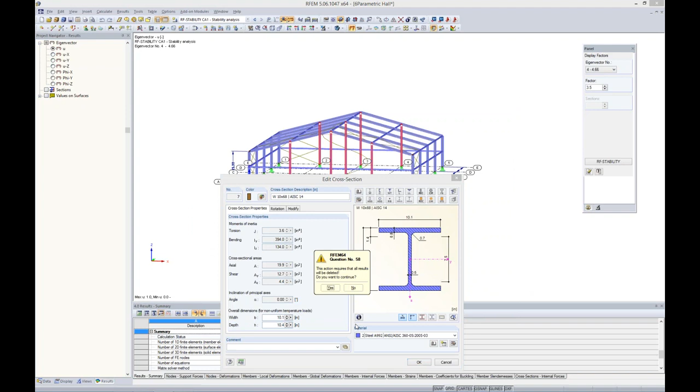And it brings up all of our cross sections. I have my favorites group activated, so I'm only looking at the AISC shapes. Let's say we want to go ahead and select a 10 by 68. Still A992 is fine, we can always modify that here as well. I hit OK, OK. Do I want to clear my results? Yes, I do. And I hit OK once again.

So now I'm going to go ahead and run load case 1 with this new section size, and you can see now that we are getting results.

So again, RFEM can be really useful in pointing out where exactly that instability is occurring. Not only that, it can be used for a stability analysis with RF Stability to show you your eigenvalues and your critical load factors to go ahead and address the buckling behavior of any members that you may have in your model.